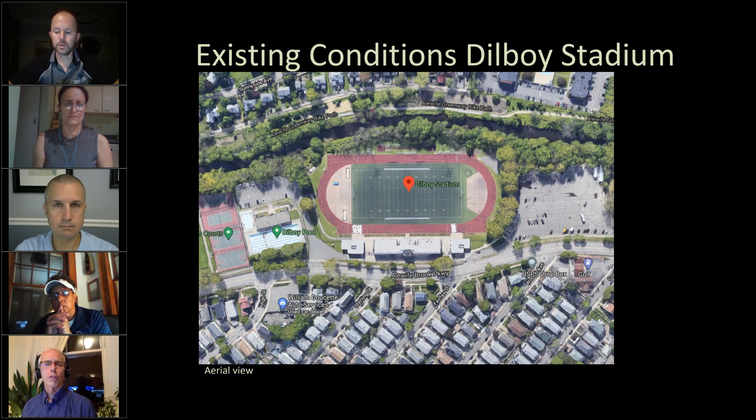Yes, I think you're right. I think the question is for the second half of this. We'll be getting there in just a couple of minutes. Yep. And this plan I have back up here basically just shows you that this is a resurfacing project for the track, and we're not doing any work beyond that line that I just pointed out again.

Okay, shall we move forward? Sure, just one more thing.

Folks, David has my name and email and phone number up. Please feel free to use that with any questions. Send me an email. You can leave a voice message at my city mailbox. I'm sorry I don't check that as frequently as I should. I'll make a point of double checking that in the days after this meeting, but I do make a point of checking it a couple of times a week. But please send me an email if you have any questions that we don't answer tonight.

Hi, could I just ask one more question? This is Councilor Ballantyne. Yes, please. Okay, so I just wanted to be clear, if you could go back on that slide that was about the materials. Yeah, maybe, or that one. Yeah, this was the one. I just wanted to be clear. So I'm happy to hear that in the infill there wasn't any crumb rubber or minimal crumb rubber. I can't remember what the language was. Was it minimal crumb rubber?

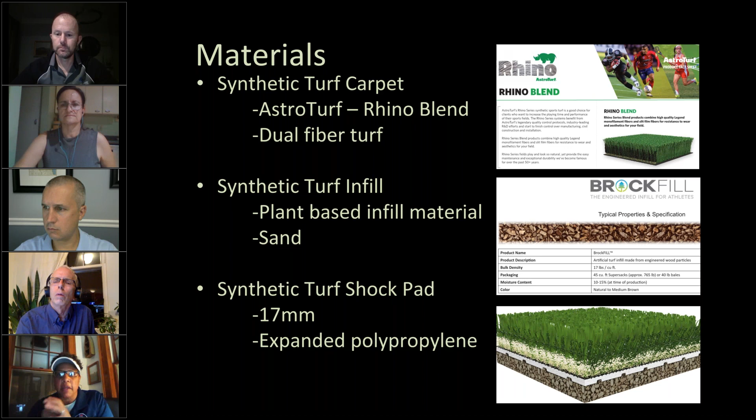Yes, we've had meetings on site when we went out to the field a number of times and met with Ben and his staff, and he was adamant about talking about the maintenance needs and having a regular maintenance schedule that they currently have and that they would continue into the future. Ben has an extensive background in synthetic turf maintenance, so him and his team and our team will do a phenomenal job with that new field.

I'm sure you will. I just wanted to understand the frequency, since I don't usually talk about this kind of thing, trench drains, normally. And I have such a well-informed constituency. I wanted to be able to have the information. So thank you. You're welcome.

So, Aaron, I think I'll just move into the auxiliary field part of the presentation. All right, it's just 7:40. Here you go. Very good. Let's go ahead.

Thank you. Okay, so again, we're going to be talking about the existing condition of the fields. These are natural grass, and I'll show you some pictures of that. We'll talk about the field design and how we're making improvements to those conditions, and specifically about the materials of the system that's being specified and the schedule. And this is a separate timeline than the stadium project, which is the one that is high priority at this point for getting completed.

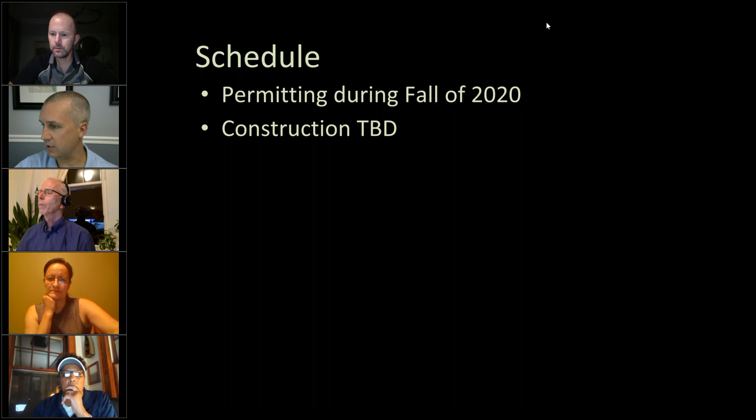And yeah, Michael Fager had another comment about a 50-foot buffer zone. So will it be a 50-foot buffer zone? No, the 25-foot riverfront area is what we focused on, because the original condition was to the fence, as I pointed out, and the 25-foot riverfront is a line which makes sense environmentally, but it also ensures that the sports program will continue to be able to utilize the field.

Just the outfield size of this ball field, which, I should have explained, we're not actually relocating the backstops on these. So these are in the same position as they are now. And being able to have the full outfield for this field, as well as have the overlapping soccer field, that 25-foot riverfront area as a permanent buffer zone, we felt was a really good point for the city to be able to commit to, while not compromising the sports program. And that, like I said, is still before the Conservation Commission. There'll be a continuance of the hearing after we've completed our review with DCR.

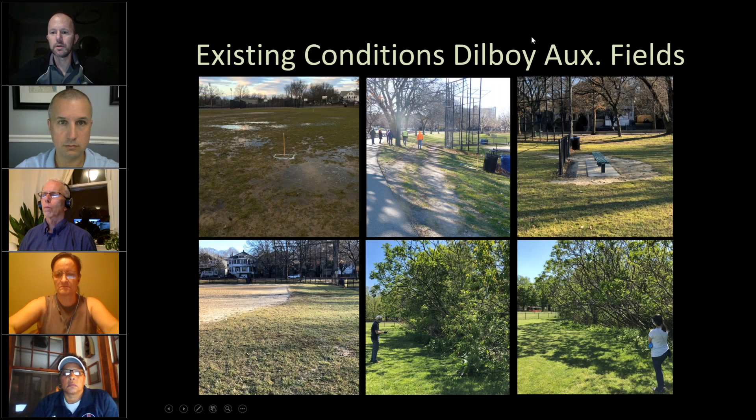Yes, there has been soil testing, both in terms of looking at the drainage as well as the horticultural needs. We've retained Pine and Swallow, who's a well-respected and well-known soil scientist, to do that evaluation for us. The good thing about this particular design is that you really don't need to do a lot of soil removal. We are going to be taking that root zone layer completely off in order to correct the grading. And at that point, we'll be screening that material and amending it.

When it's replaced, and for the final field construction, that's when these sand slits are cut in. They go down, I think it's 8 to 10 inches. So basically through the root zone, and they'll intersect this subdrain system that then goes down to about 24 inches below the surface of the ground, so that your irrigation pipes can occur between the drainage pipes and the field surface.

So the other systems that we looked at, we ruled out due to being cost prohibitive, and also construction logistics on the parkway would have meant a significantly greater amount of earth removal. To modify that root zone to be a high sand root zone for permeability throughout the profile would have meant a tremendous amount of trucks leaving the site and coming back to the site with a new root zone material. This is a system that allows most of the soil material that's there to remain on site.

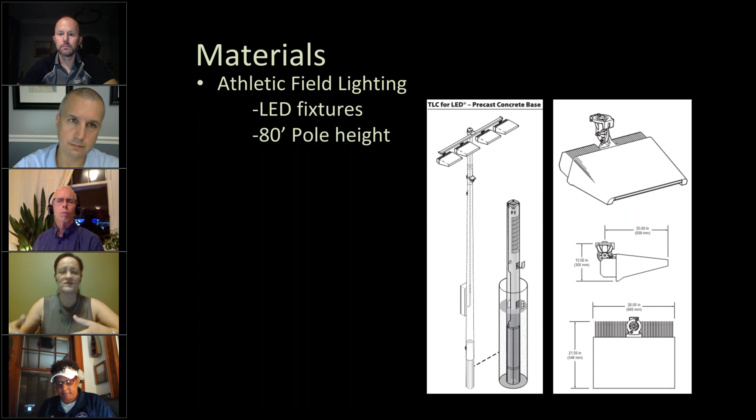And, you know, I just want confirmation that the field won't flood. That the field won't be the spongy flood. Anything can happen if you have this incredible storm. But I mean that it does not become this spongy area. It rains, it's a sponge. It rains, social media blows up, phone calls, because there's always flooding in this area. So that's the backdrop. That's the context in which I work with my constituents over here.

So I just want to understand in a better way that the investment that we're putting in these fields will be usable fields. I hate to ask you this, Jill, in a rain. I mean, I know there's a limit with the rain, but that it's not going to be mush and it's not going to be a sponge when it rains.

Yeah, I think it depends on the kind of rain. I think Ben and his team kind of monitor that, and if there's definitely too much moisture, we'll have to close the field. But we've seen with some better drainage in our newer fields that there's less closing due to extreme rain events. But it will be definitely better than it is now for sure.

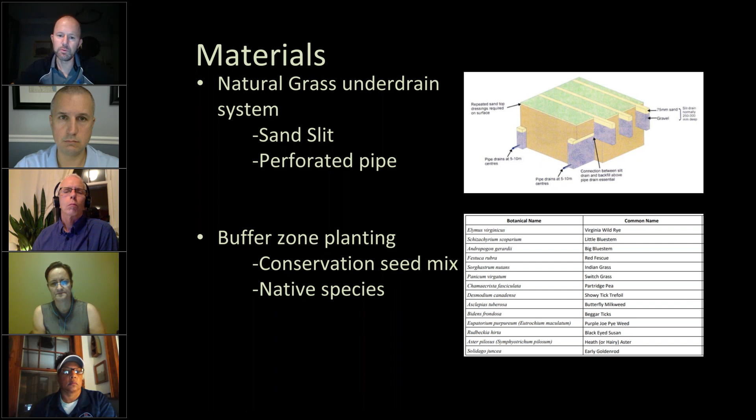Okay, thank you. And just a final question, and hopefully constituents have more questions. I have never seen the stadium flood myself. When the water tables were so high it was flooding the grass fields and along the river, does that mean that the stadium is at a higher elevation than the grass fields? Just out of curiosity.

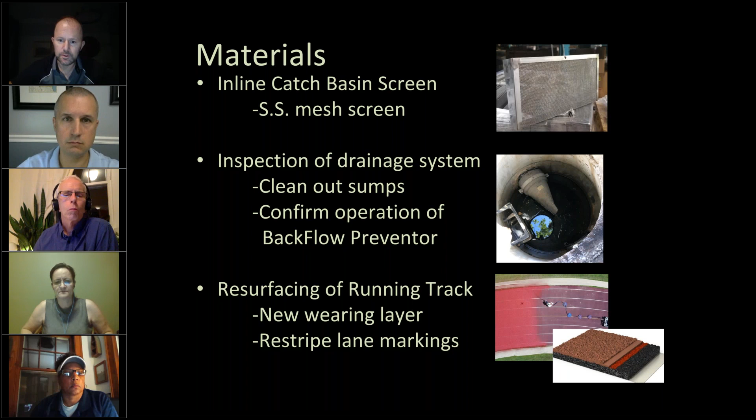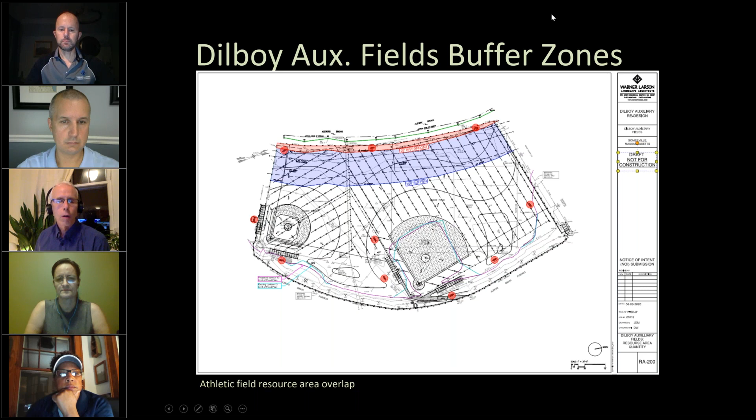To the best of my knowledge, we've had frequent communication with DCR, and I believe we have all of their questions at this point and have answered them all. But we'll certainly follow up with them, and then when we go to the Conservation Commission to get their approval of the plans, we'll be able to incorporate DCR's questions there as well.

And we'll get this presentation up on the city website. So give me a couple of days, but if you go to the city website and you use the search bar, you should be able to find the presentation.

I'm sorry, Councilor Ballantyne, I couldn't hear you. Thank you. Are you stopping the meeting now? I wanted to make sure that... I guess we're getting there, yes. I'm not necessarily stopping the meeting. If people have additional questions, let's make sure we address them. But I want to be careful of everyone's time.

Aaron, I just wanted to make sure to recognize that Councilor Mbah did join the meeting. Yes, we did. And Will had asked a question earlier that we had answered. So thank you, Councilor Mbah. Appreciate your attendance. I know that these are issues that concern you as well. I know from several city council meetings that you have a special place in your heart for the environmental issues.

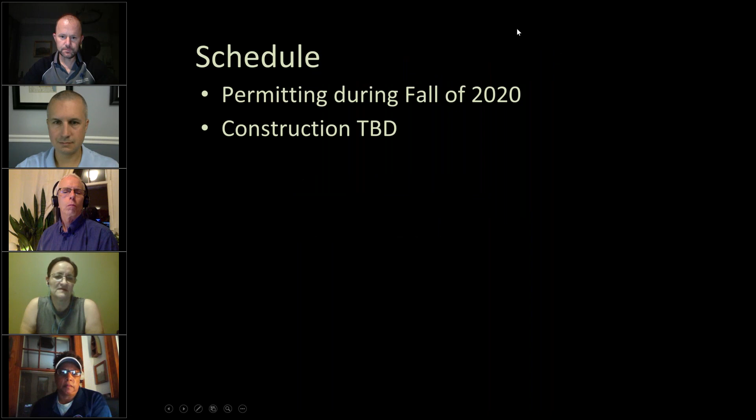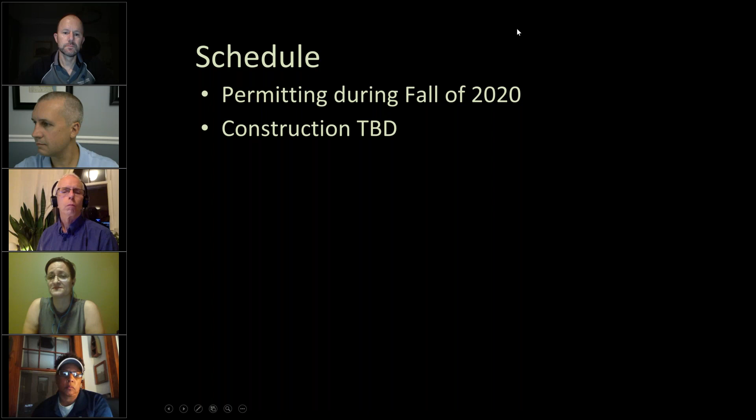Thank you, everybody. Thank you, David, Josh, Aaron, Jill. It is very exciting. Just one thing, I'm not sure that I saw where the soccer field was going to go. I just know it's going to be in the outfield. Maybe I didn't see it properly, but it would be exciting for the soccer folks to be able to see the actual outline or a dotted line.

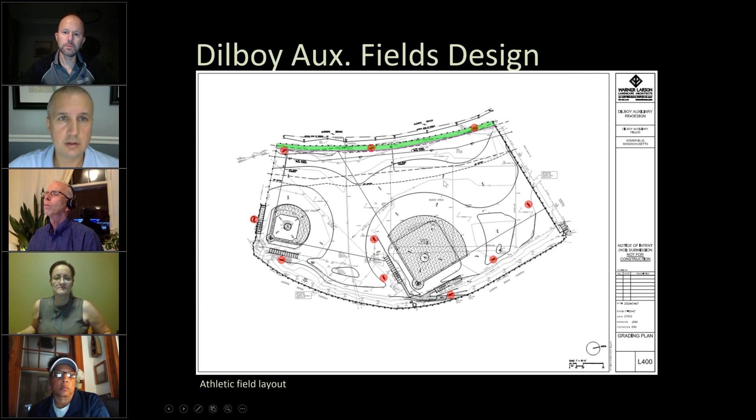I think what we can do, Josh, is just make that visible on the slide before we send an update to Aaron. Sure. If you want, I can share a screen and show it. I guess Aaron would have to let you do that? No, I think you've got control right now. I can add it to this before we send the slide deck through. That's wonderful. Thank you.